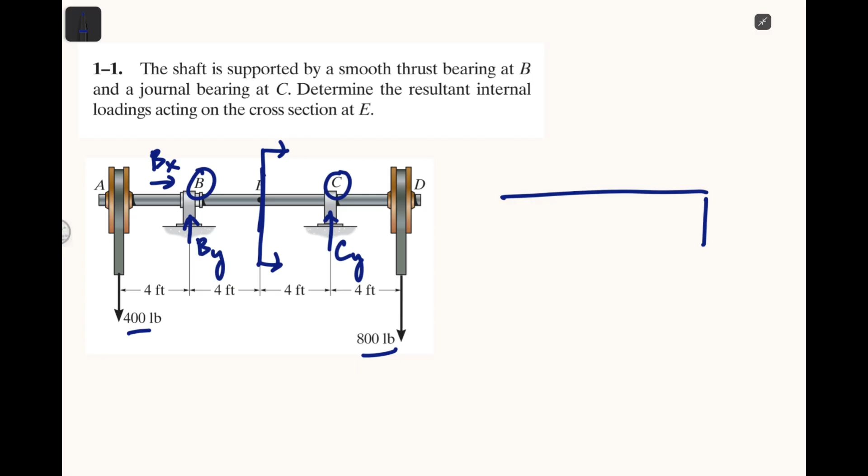Okay? Ngayon, i-consider natin yung right side nung section natin, yung cut ng section. So, meron tayong line, tapos meron tayong external na load, which is 800 pounds. And in between, andyan yung point C natin, Cy, which is meron tayong reaction na Cy. And then, dito sa point E, meron tayong lalabas na dalawang internal loads or internal forces. We have Ey, and then we have Ex.

Based dito sa free body diagram natin ng right na section, pwede nating kunin yung magiging equation ng Ey tsaka Ex. Balikan natin yung general na free body diagram natin dito, sa left na yung original na figure natin. Mapapansin natin na wala namang ibang horizontal force na present dito sa free body diagram. So, Bx lang. Ibig sabihin yan, automatic na Bx ay magiging 0, base ito sa magiging equation natin na summation of forces equals 0, since wala namang ibang force. So, therefore, Bx equals 0.

Similarly, dito sa figure natin, sa free body diagram sa right side ng cut natin dito sa point E, pag nagsasum up tayo ng summation of forces equals 0 sa x-axis o horizontal forces yung i-consider natin, automatic na magiging 0 yung horizontal force natin or horizontal component ng E. So, meron na tayo ngayon ng internal loading on the horizontal na direction.

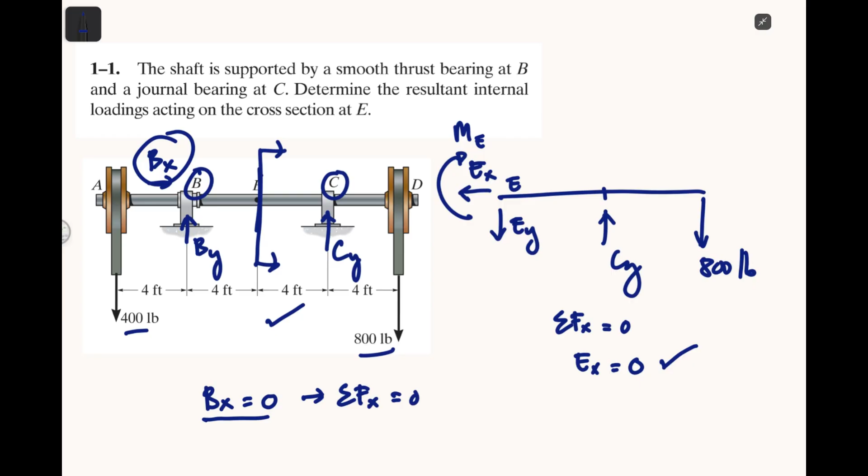Aside pala sa dalawang internal loadings dito na x and y, meron din tayong moment, internal moment, which is papangalanan na natin na ME. So, meron tayong dalawang forces and meron din tayong moment, internal moment na kailangan i-consider. So, meron tayong x again. So, dito naman tayo sa y. Para makukuha natin yung y, hindi tayo gagamit ng moment, kasi pag gagamit tayo ng moment, magiging involved si ME. So, magkakaroon tayo ng additional na unknown.

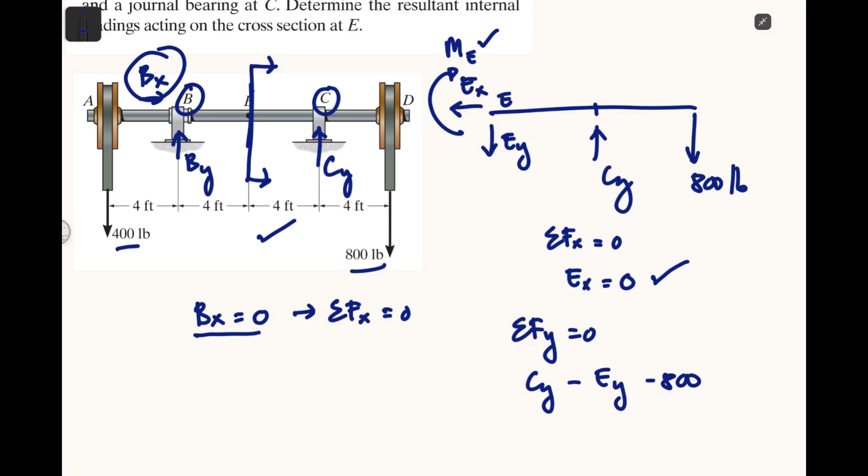So, yung gagamitin natin, magsasum up forces tayo. We have summation of forces along y equals 0. So, meron tayong Cy, which is upward, tapos minus naman si Ey minus 800 pounds equals 0. And since hinahanap natin dito is Ey, so gagawa tayo ng equation, which is for Ey. So, Ey now is just equivalent to, we have Cy minus 800.

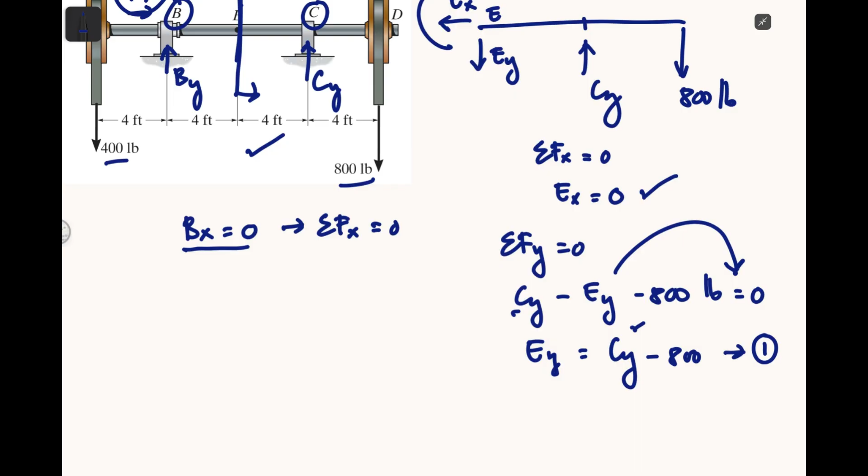So, ito yung magiging equation 1 natin. Nilipat lang natin dito si Ey, so magiging positive siya. Tapos, retain lang si Cy and 800. So, kailangan lang natin makuha base dito sa equation 1 natin is si Cy. Kasi meron naman tayong given na 800. Saan natin makukuha si Cy?

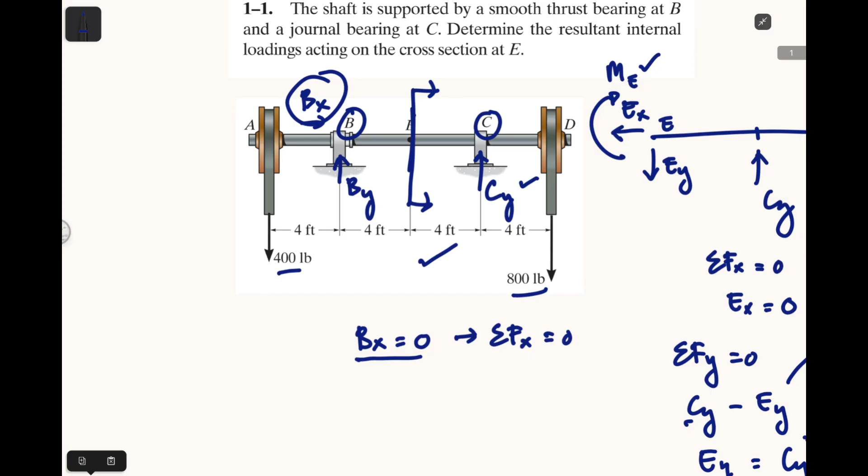Babalikan lang natin yung original na free body diagram natin. So, ito yung si Cy, and then we have unknown din si By tsaka si Bx. So, ang gagawin natin, magsasum up moment tayo at point B para hindi na natin magagamit si By. Ma-e-eliminate natin sa equation si Bx and By kasi wala naman silang moment at point B.

So, mag-sum up tayo ng moments at point B. You have summation of moments at B equals 0. Tapos, para maging positive na agad yung moment natin na pwedeng mag-create dahil dun sa Cy, gagamitin natin na direction is counterclockwise, positive, kasi yung moment ni Cy, pag ganun, with respect to point B. So, positive na natin yung counterclockwise. So, we have positive na Cy times ano yung moment arm niya? 4 plus 4, that's 8.

So, that's 8. Tapos, ito, magkikreate siya ng clockwise na moment. So, that's a negative. We have 800 times, yung moment arm niya is... hindi pala, yung moment arm pala dito is 4 lang. So, we have Cy times 4 minus 800. Ito lang pala yung tama.

So we have CY times 8. Tama, no? Kasi 4, dito pala yung C. Nalito ako sa point E. Point B pala yung moment natin. So tama yung kanina, ito lang sa 800 meron siyang additional na moment arm na 4.

So magiging 12 yan, no? So yung moment arm niya is 12. And then ano pa ba yung merong moment dito at point B? Of course, meron tayong moment 400 pounds.

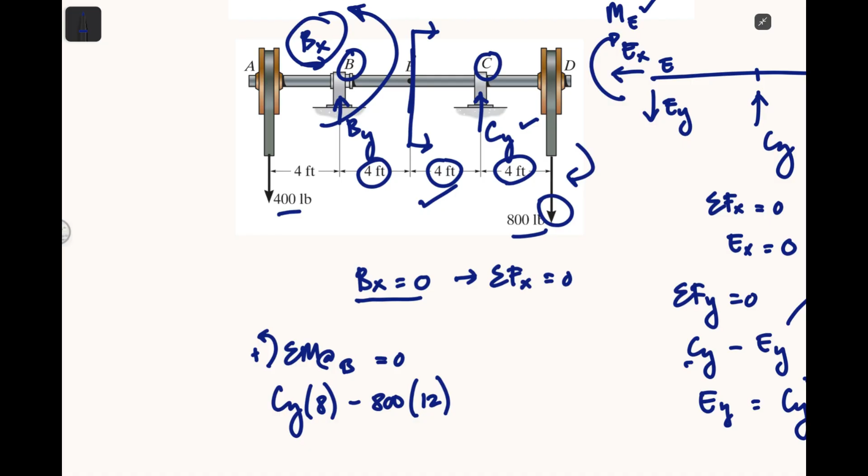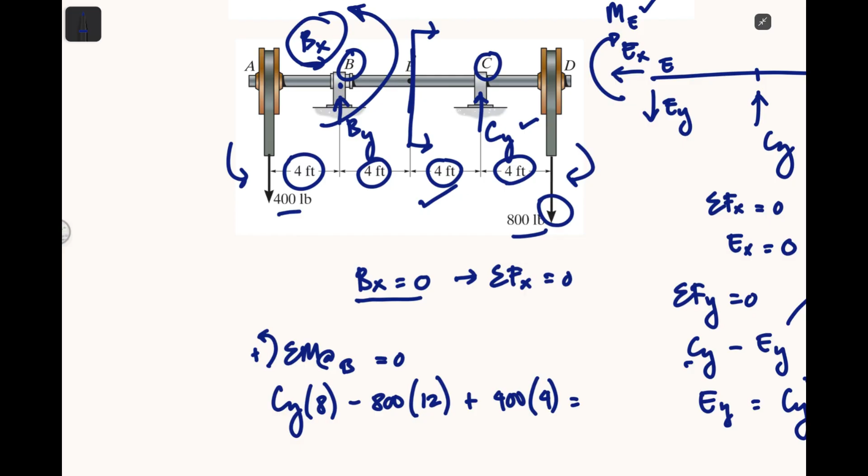Ang direction ng moment ng 400 pounds with respect to point B is pag ano, no? Which is counterclockwise, positive, no? So we have plus 400 times yung moment arm natin is 4 feet. So 4 lang. Then meron pa bang iba na merong moment dyan? I think wala na, no?

So yun lang, we have 0. So yung magiging equation natin for CY is equivalent to, lipat natin si 800. So we have 800 times 12 minus 400 times 4, divided by we have 8. So CY is just equivalent to, dito tayo sa calculator natin, we have 800 times 12 minus 400 times 4 and then all over 8.

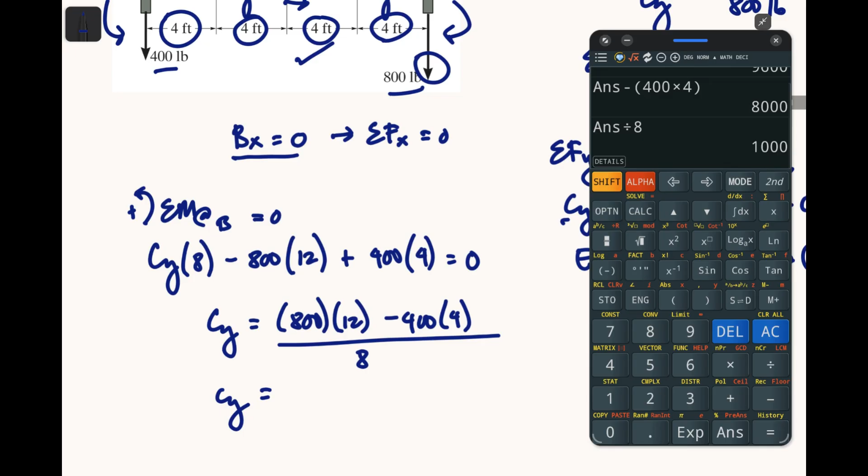So we have 1,000 pounds. And then minimize lang natin. So ngayon meron na tayong value for CY.

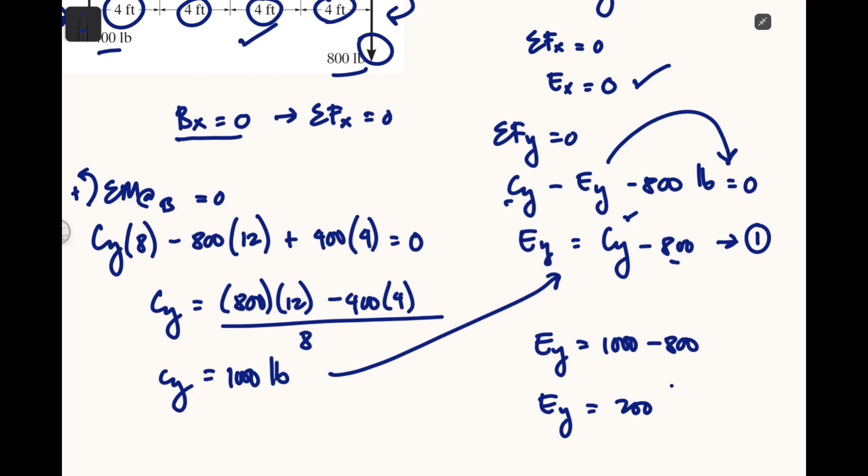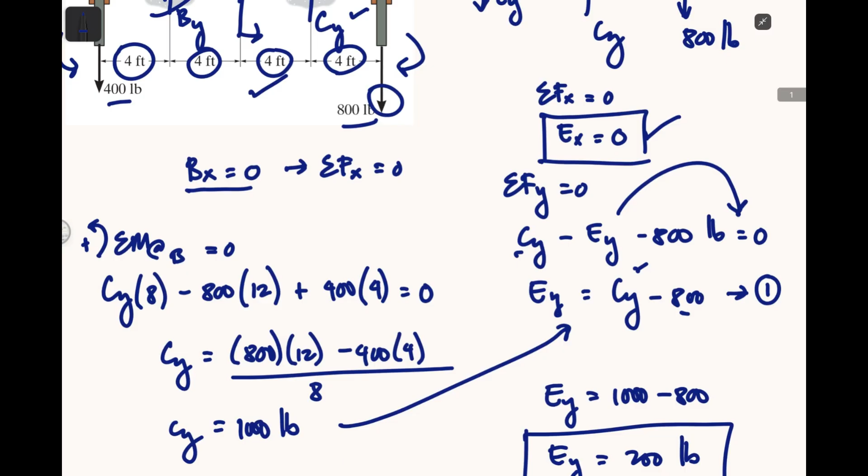Substitute na natin siya dito sa equation 1 natin. So we have EY is equivalent to 1,000 minus 800. So EY is equivalent to 200 pounds. So meron na tayong sagot for EY. Kanina, meron na tayong sagot for EX. At tama yung inassume natin na direction, no, for EY, which is downward kasi 200 positive yung nakuha natin.

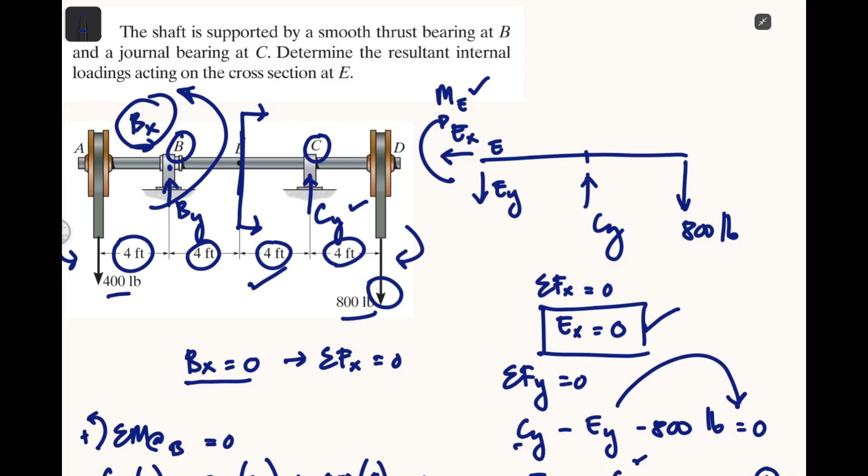So meron na tayong dalawang internal forces, X and Y. Ngayon naman kukunin natin yung internal moment na ME. So gagamitin natin yung free body diagram ng right na section ng E. So magsasum up tayo ng moments. Sum up moments at E equals 0, since yung ginawa natin na direction ng moment E natin is clockwise, so ika-clockwise na din natin yung positive.

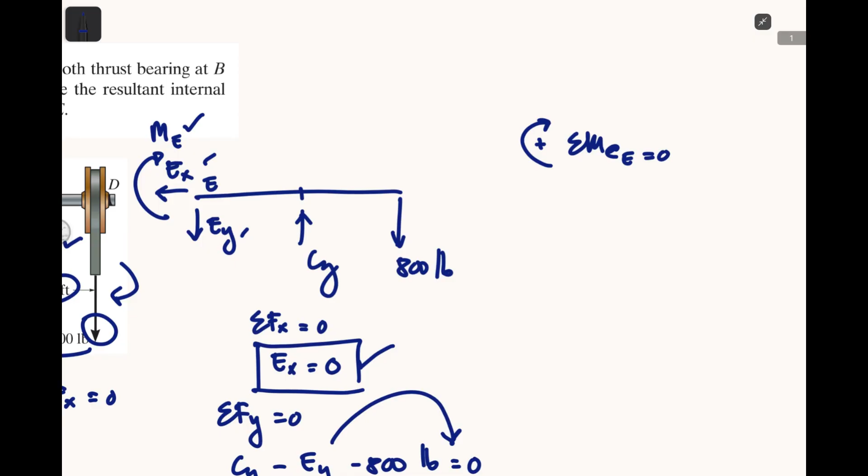Walang moment dyan si EY and EX kasi dyan tayo nag-moment mismo sa point E, which is wala siyang moment arm, yung dalawang forces na yan. So wala din silang moment. So of course meron tayong moment E. Hindi na kailangan ng moment arm yan kasi moment na yan eh.

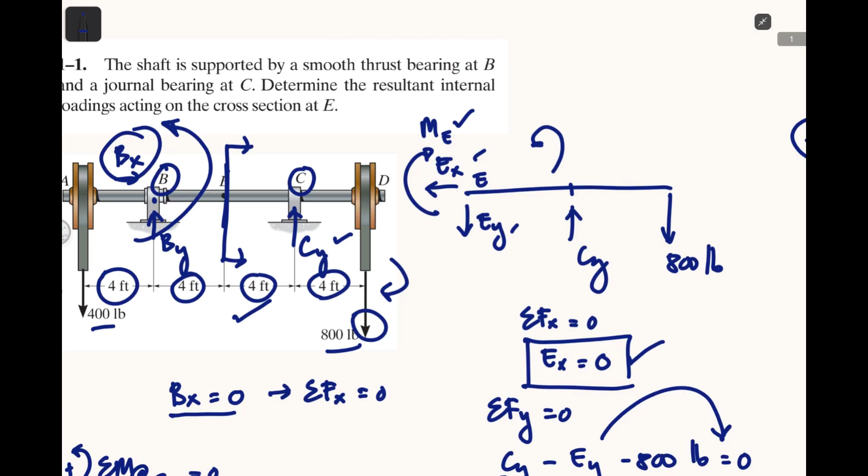And then we have yung CY, meron siyang moment na pa counterclockwise. So that's a negative CY times 4, kasi 4 yung moment arm ng E papunta dun sa C. So meron tayong 4 feet. Tapos ito no, 4 to 4 and then 4 feet din.

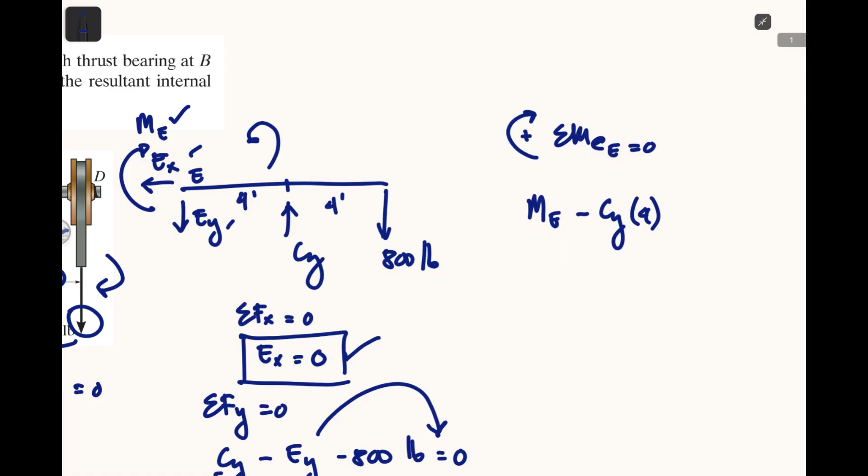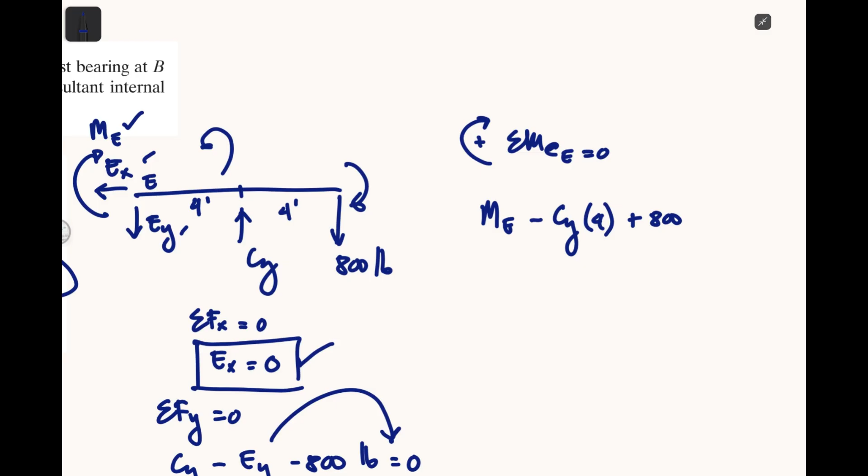And then meron tayong moment na 800 pounds na makikreate ng 800 pounds sa point E. At direction yan is clockwise. So therefore positive, no? So we have plus 800 times 8 feet equals 0.

At since CY natin is 1,000 kanina, ito yun, no? Nakuha natin 1,000, substitute natin. So we have moment E. Lipat na natin silang dalawa sa kabila, no? Para magkaroon na tayo ng equation for moment E.

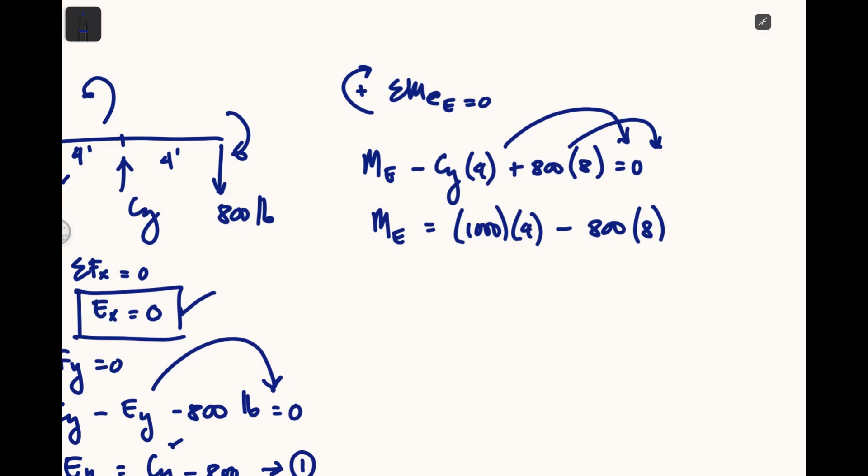So magiging positive yan si CY. So we have 1,000 times moment arm na 4. Tapos may negative si 800 times 8. We have moment E is just equivalent to, sa calculator natin, we have...

1,000 times 4 minus 800 times 8. That's a negative 2,400. So negative 2,400, ibig sabihin yan, or pound-foot yung magiging unit. So ibig sabihin yan, mali yung inassume natin na direction.

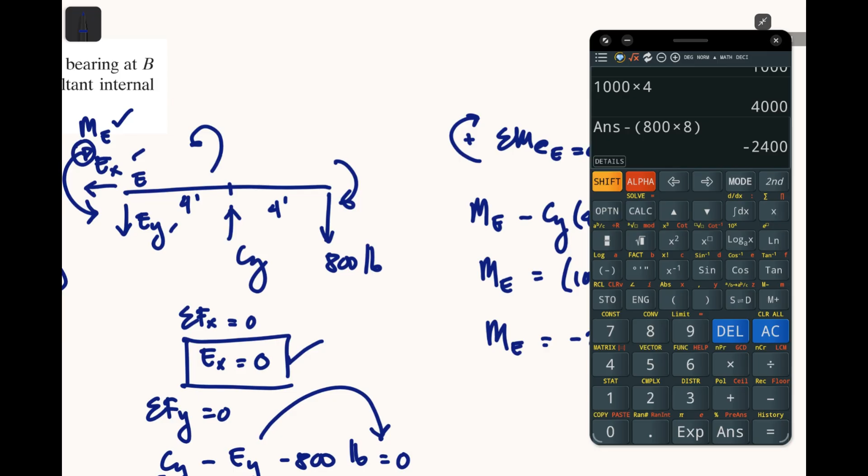So dapat counterclockwise, so magiging positive lang yan. Moment E is positive 2,400 pound-foot. Pero yung direction niya ngayon is, which is counterclockwise, kasi yun, naging mali yung, or naging negative yung lumabas na sign nung sagot natin.

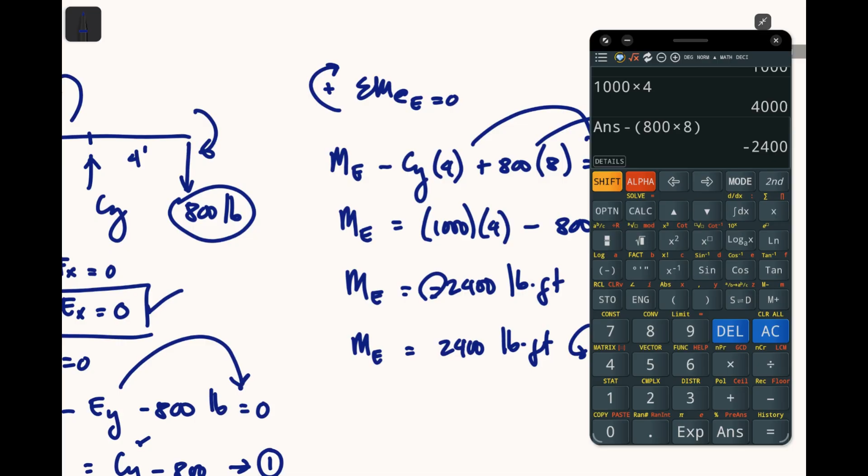Okay, so double check lang natin bakit kailangan counterclockwise, kasi yung 800 is magkikreate siya ng clockwise pag nag-moment tayo at point E, no? So kailangan merong counter dito sa point E. So ganun lang yung pag-double check niya, no, ng mga signs ng moments.

So I think ito na yun, no, para sa sample problem na to.